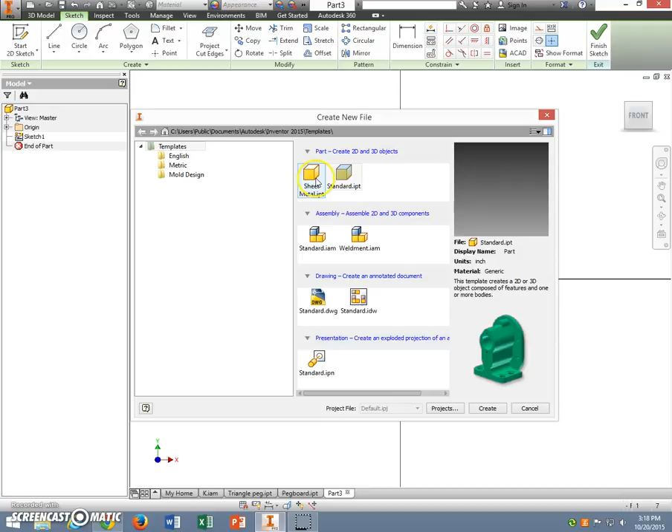So first we're going to make the mallet head. We do a new standard IPT, or part drawing, and we're going to create a portion of the head and revolve it.

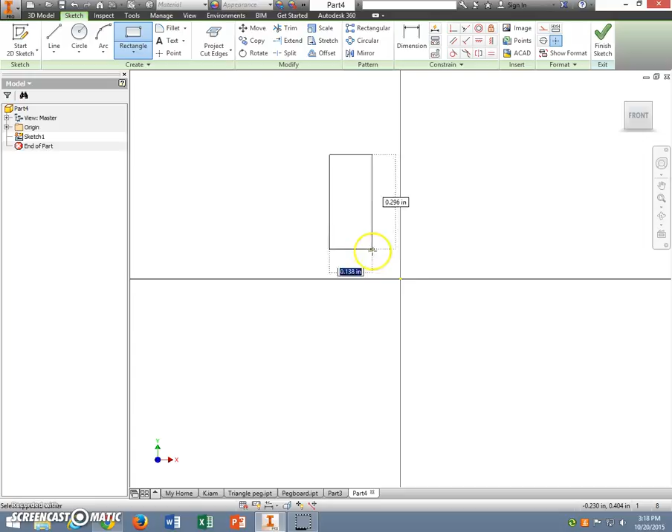The only requirement you really have for the head right now is that it has to be 1 3/4 by 3 inches long. So to do that, I'm going to go up to the rectangle tool and draw a rectangle and measure that. It's got to be 3 inches long or tall.

So we're going to type a 3 there. And then the diameter is 1 3/4, so we're going to take half of that. This length then is going to be 7/8, or 0.875.

Now you can do what you want. This is going to be an axis point, we're going to revolve around that, and this will be the shape of the outside of it.

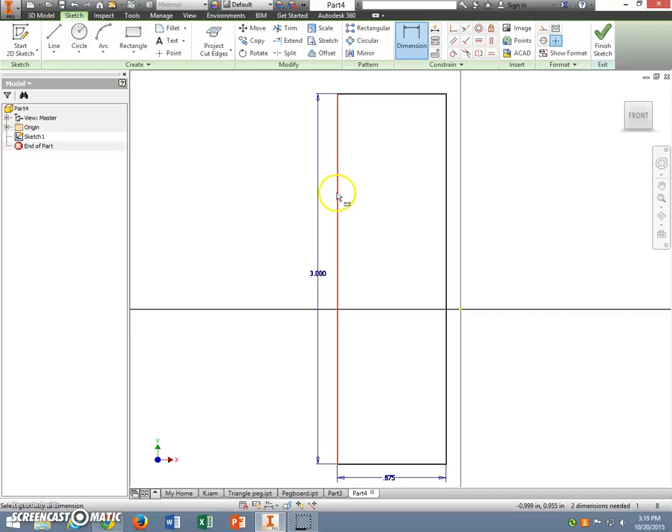So if you want to go and put a circle in, you can click and make a circle, and we'll trim this out in a little bit. We'll make them all the right size and the right spots.

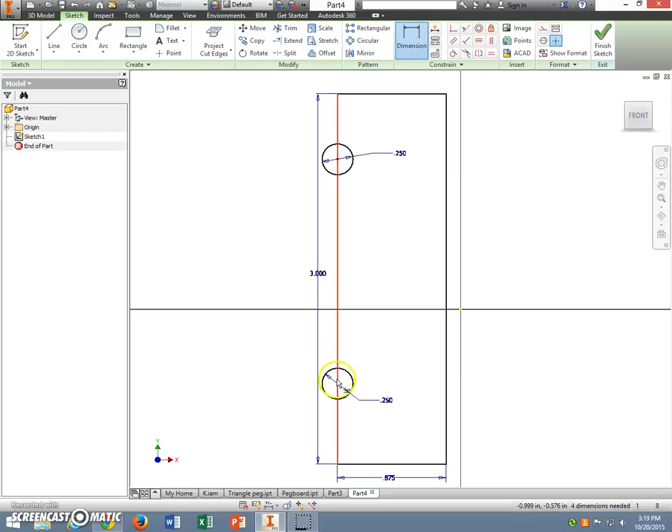So if I have my circles there and I want them to be 1/4 inch, I'm going to put 0.25 for the dimension. If I want them in the same spot, then I will measure from the center point to the edge. Let's say I want that 3/4 of an inch.

And I do the same for the other one - edge to center point is 0.75. The other thing you want to make sure you don't do is right in the middle here at 1.5 inches, that's where the handle is going to go in, so you don't want to have anything. It should be flat there.

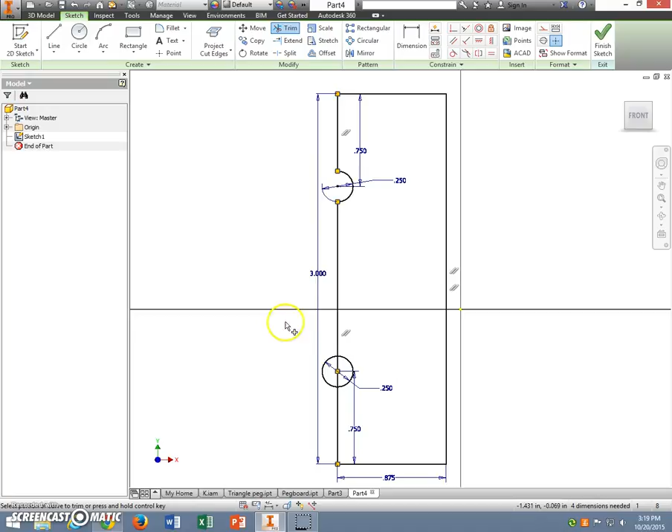Okay, so now if I trim this, I can go ahead and trim those parts, so now it has a little groove in it. And if I want to, I can go and put a chamfer on here or fillet it. I'm going to put a chamfer, and if you go right to the corner here, you can click on it and it will angle it off.

The distance right here is at 0.125, and I'm just going to leave that, but you can change that and make it a different shape if you want. Okay, so now I've got my mallet head side view done.

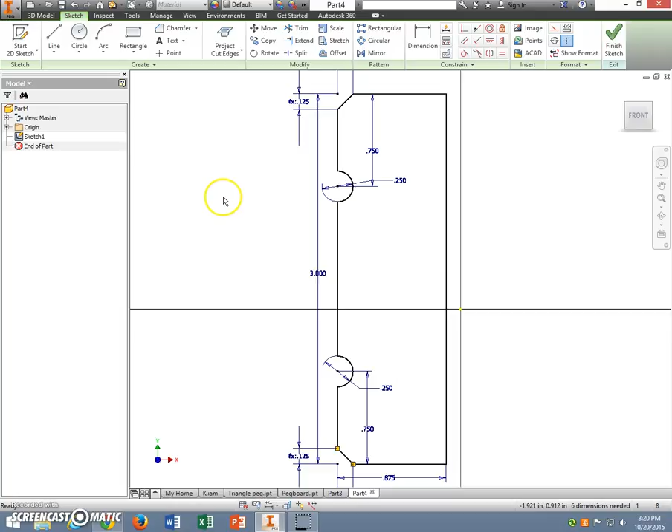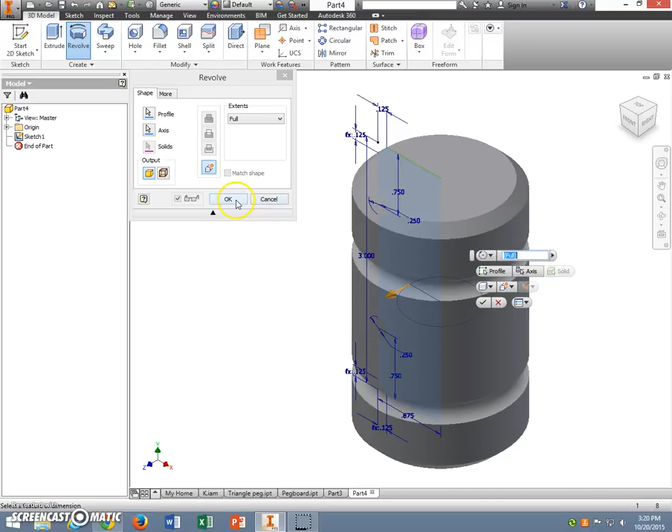So I'm going to finish this, and then go to a tool called Revolve. When you revolve, first thing you got to do is pick your part, then there's an axis point. So you want to axis around this part, and it will rotate or revolve around that. You can see our little shape here, and it revolves that shape all the way around that center line. Then you click OK, and you've got your mallet head.

Okay, now the only thing we have to do is put a hole in here where the handle's going to go. To do that, we're going to create a work plane. Over on the origin, you're going to click and do the YZ plane. Now the YZ plane is not where it's supposed to be, it has to be on the edge.

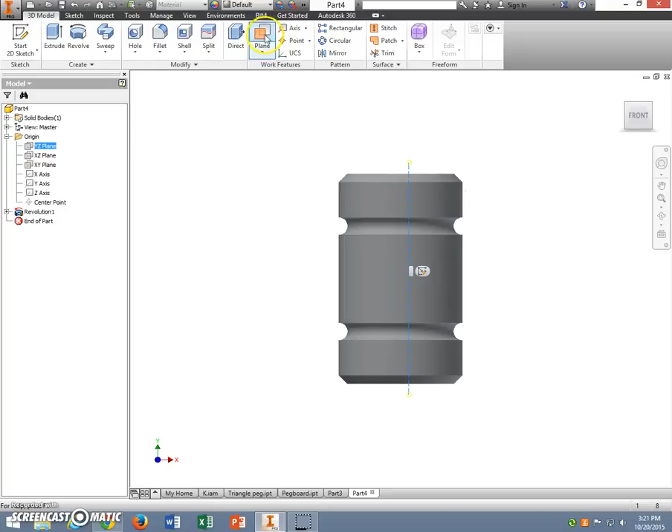So we're going to go to plane, and we're going to go tangent to surface and parallel to plane. Then we're going to click YZ again, and click this spot, and you'll notice there's a little yellow thing here. So if we revolve around that, now we've got a work plane that's parallel to the center point and tangent to it.

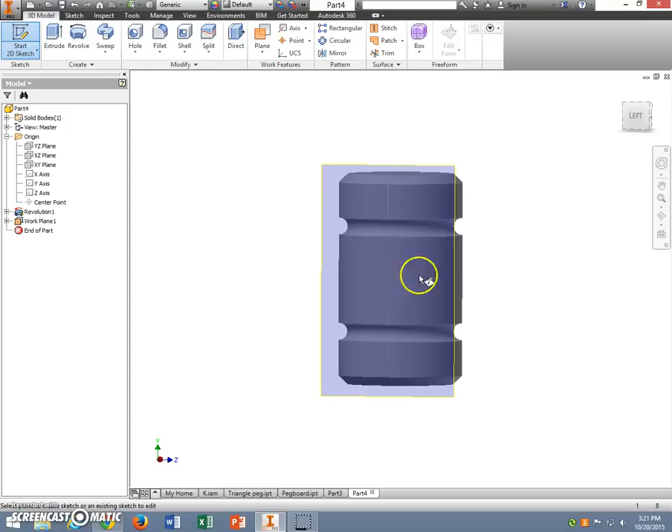So if I'm going to sketch on that, I have to click on the outside edge of this. Now I can sketch in the work plane, and what I need to do is put a center point.

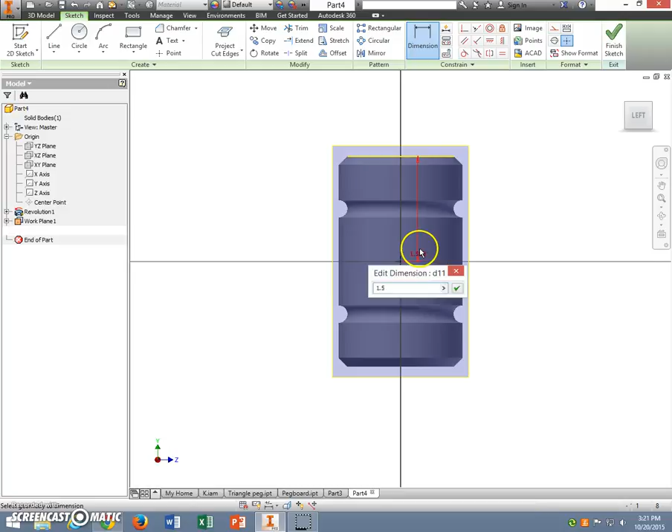So I'm going to click the point tool, and come in where I think the center is, and you can measure that if you need to. So from the top edge to the center of that point, it's supposed to be 1.5. Okay, so that locates it in the center, and we're okay. We can do another one from the side, but I think we're going to leave it there. So if you're on the center line, that should be where the center is.

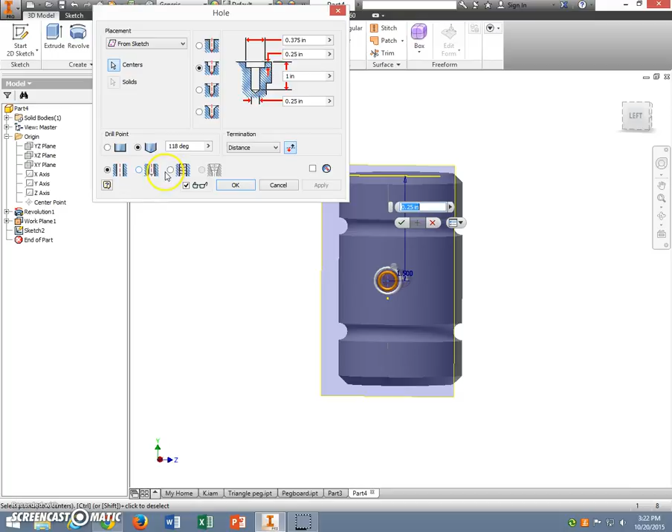So we're going to finish sketch, and then go to the hole command. Now to do the hole, we're going to do a tapped hole. We're going to click this second one down, and we're going to put threads on it as we go.

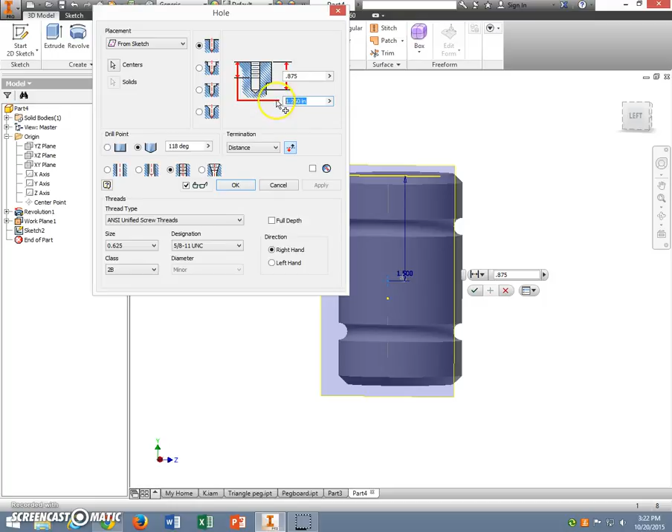So once you get in here, you can change the size to 0.625. And our distance right here - I'm sorry, we're going to go back to this regular one here - so our distance right here is going to be 0.875, and our thread distance is 0.625. And then when you click OK, you will now have a threaded hole in there.

And then you are going to go over to your work plane, right click, and click on visibility. You're going to save that as mallet head.

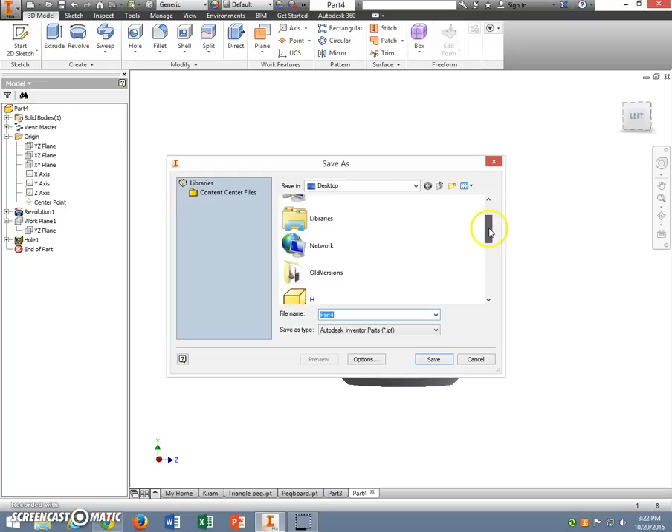Okay, once you have that one, we're going to start a new standard IPT for the handle. New, standard IPT. And for the handle, all we have to do is make a cylinder, and then we're going to put the threads on the end of it.

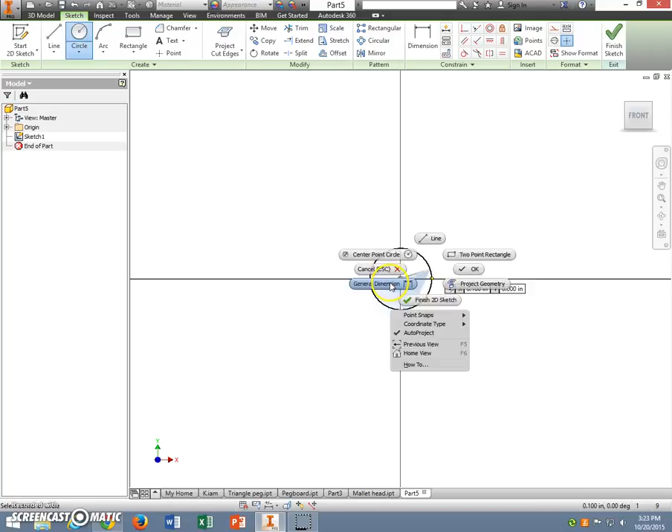So, first thing you want to do is draw a circle. Start 2D sketch, XY plane, and you can draw a circle. The diameter of the circle is going to be 5/8, or 0.625.

And when we finish that, we will extrude it to 8 inches.

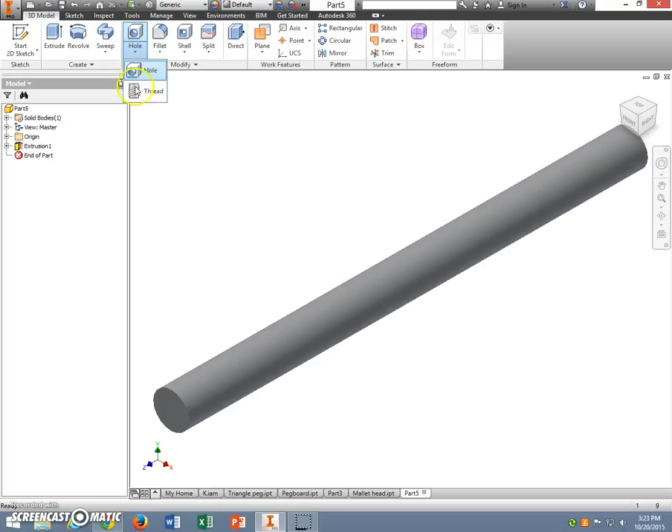Okay, now we have our handle, and the only thing we want to do is put our threads on. So if you go to hole and thread, and click on it, we don't want full length. So right here we can put the length of it, and we will do 0.875, and apply that, and cancel.

And then on the back end, we're going to put a chamfer. So we're going to go to fillet, go to chamfer, and click this edge here, and we have to change the size of that, so we're going to make it 0.0625.

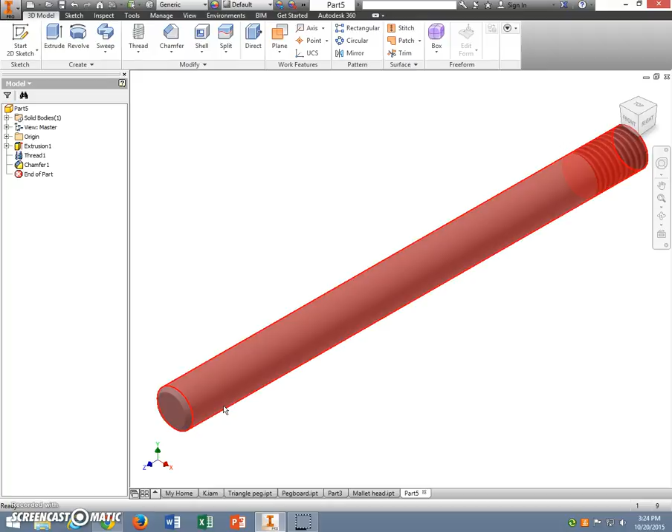And then you'll save that as mallet handle. Then you're done.